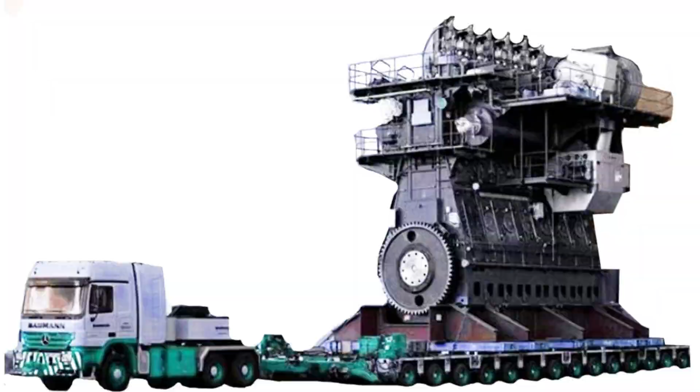This is the world's most powerful engine, and it's a two-stroke. One of the century's greatest feats of engineering is about to astound you. The astonishing Wärtsilä RTA96-C engine is indeed the most powerful engine in the world to date. We're talking about a monstrous machine that propels the biggest oil tankers and cargo ships that rule the seas.

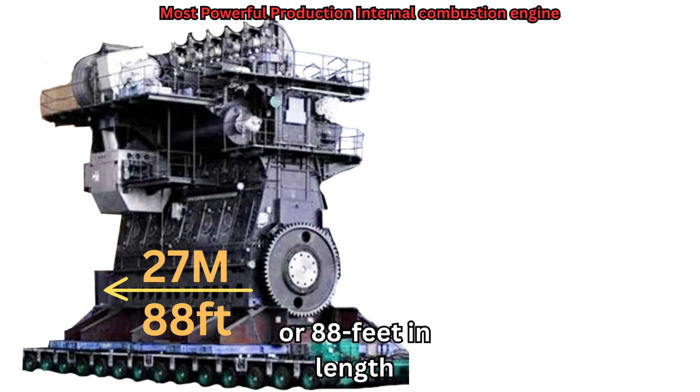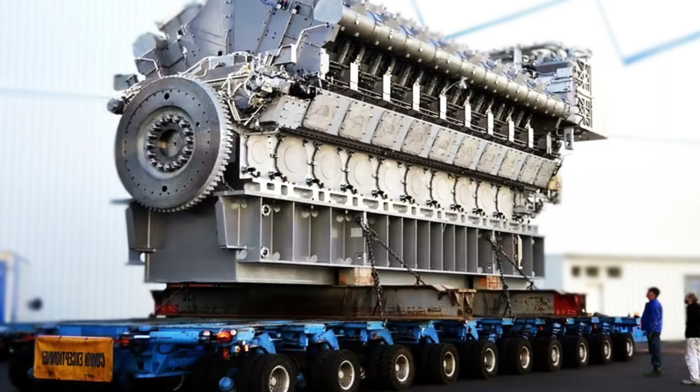The mechanical titan stretches out to a mind-blowing 27 metres, or 88 feet, in length. It rises upwards at a height of around 13.5 metres, a towering 44.3 feet. Wow! Its actual immensity would leave you speechless. However, there's so much more to this incredible engine, so prepare yourself for some staggering figures.

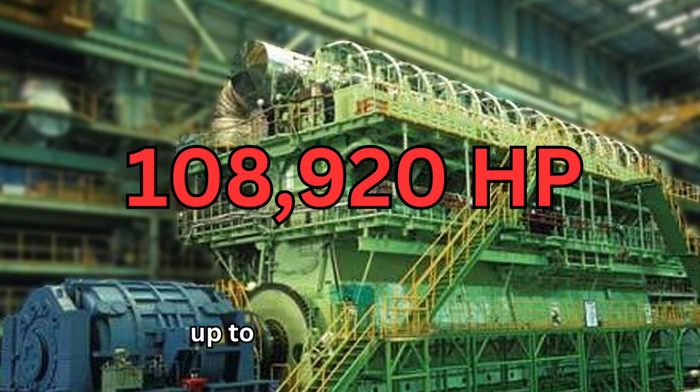This monster can generate up to 108,920 horsepower, which is equivalent to an astonishing 80,080 kilowatts of power. That's the amount of strength required to move those enormous ocean-sailing tankers across the waves.

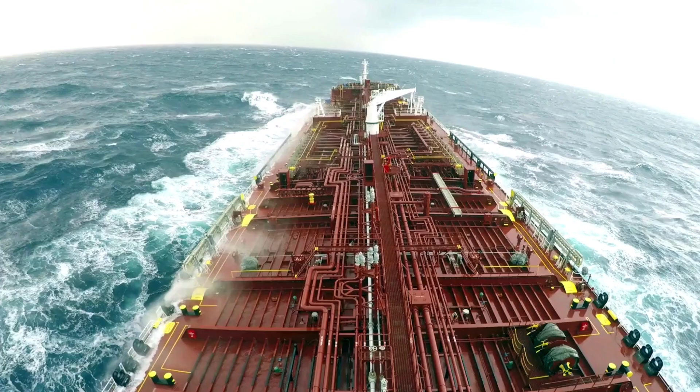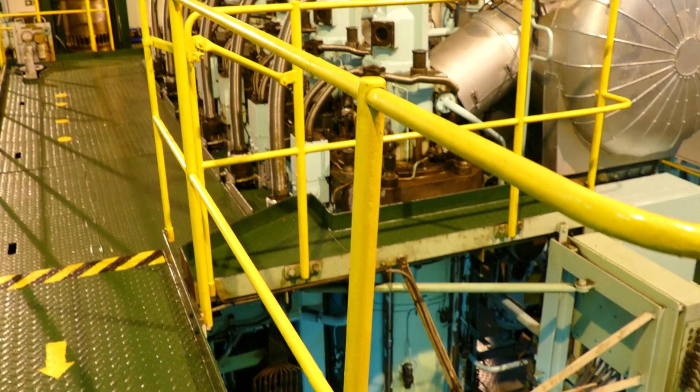Let's set sail on a historic journey through some history of engineering. Imagine the late 20th century, when the maritime industry yearned for bigger, more powerful ships to dominate the waters of the world. It was a nautical miracle that came out of the depths of ingenuity. Here in this arena, where the necessity for innovation and the desire for strength and efficiency collided. And the response to this was the birth of the most powerful engine in history.

An absolutely incredible feat of engineering. This mammoth of the high seas was an engineering marvel that would change the course of maritime history.

With its largest 14-cylinder version, this is a turbocharged, low-speed, two-stroke diesel engine made by the manufacturer Wärtsilä in Finland, and weighs a gigantic 2,300 tons.

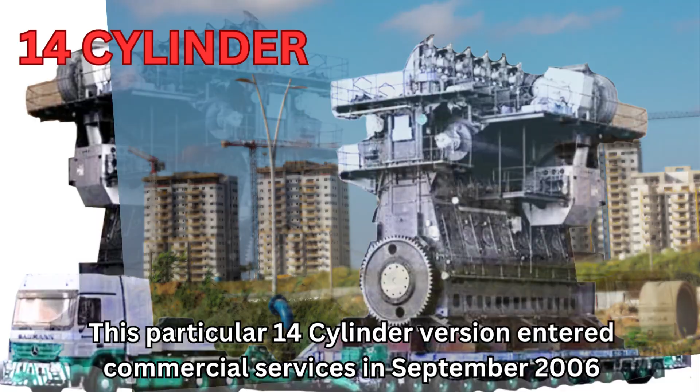This particular 14-cylinder version entered commercial service in September 2006 and uses the common rail system for fuel delivery, which provides maximum performance at lower engine RPMs, ultimately reducing fuel consumption and harmful emissions.

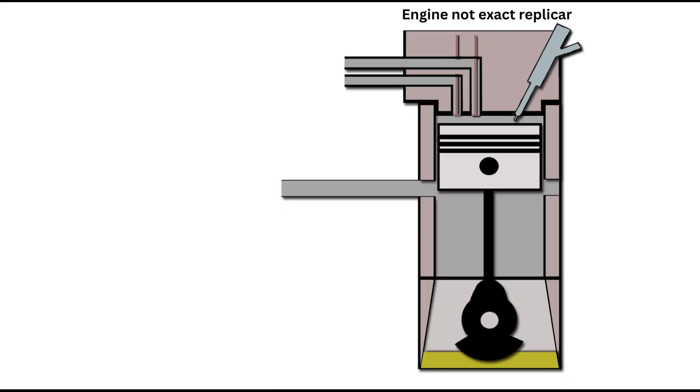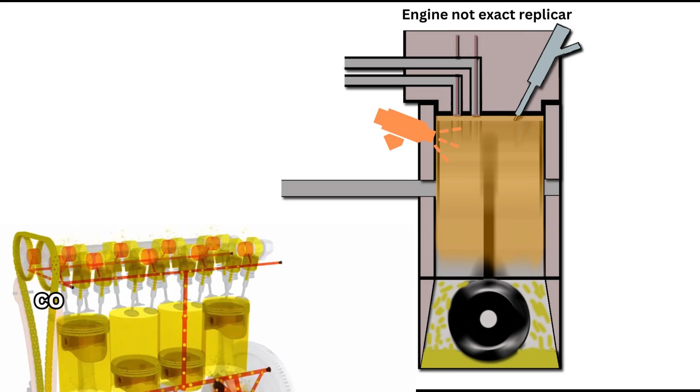There's a split lubrication system for this engine, where the cylinders and the crankcase use their very own specialised lubricant. The cylinders are lubricated by a timed injection of a consumable lubricant, which protects the cylinders from wear by neutralising acids formed by the combustion of high sulphur fuels commonly used.

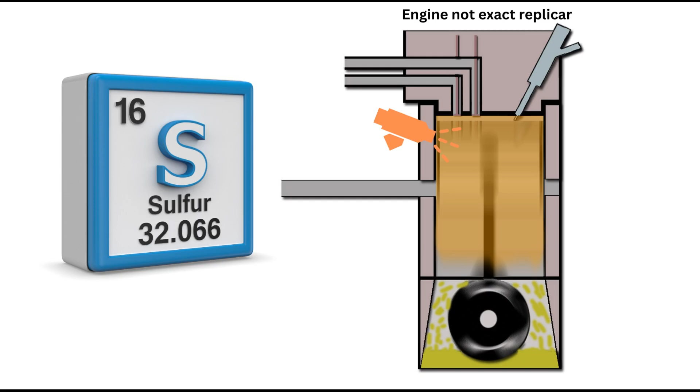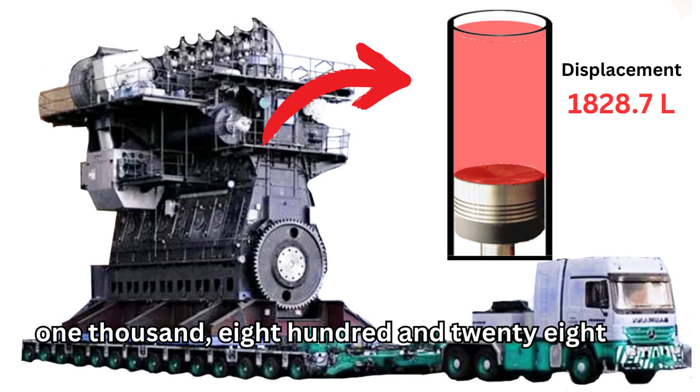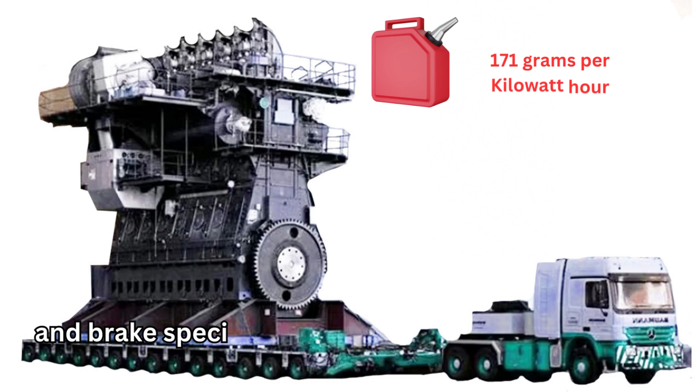With a bore diameter of 38 inches, a stroke of 8.2 feet, and a displacement of 1,828.7 litres, with an engine speed of between just 22 and 102 RPM, having an average piston speed of 8.5 metres per second, and a brake-specific fuel consumption of 171 grams per kilowatt hour of fuel, and an absolute gigantic torque of...

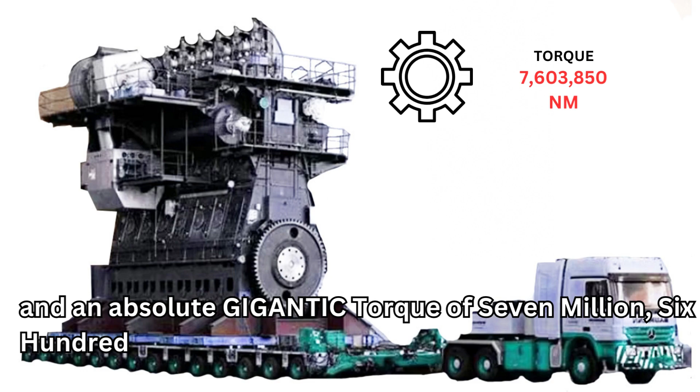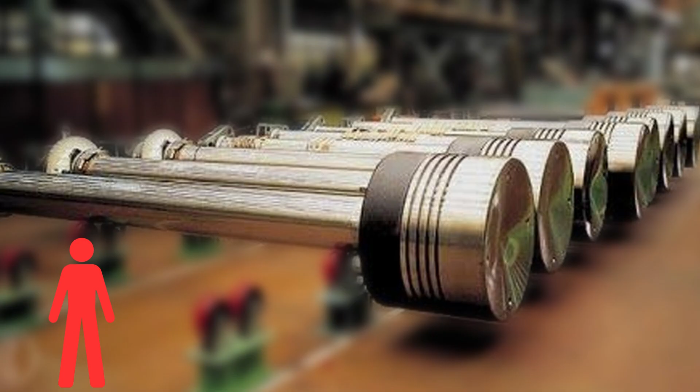7,603,850 Newton metres. And with the weight of the crankshaft alone being 300 tons, and each piston weighing 5.5 tons, with a height of 6 metres each, the Wärtsilä RT Flex 96C is absolutely colossal in every way.

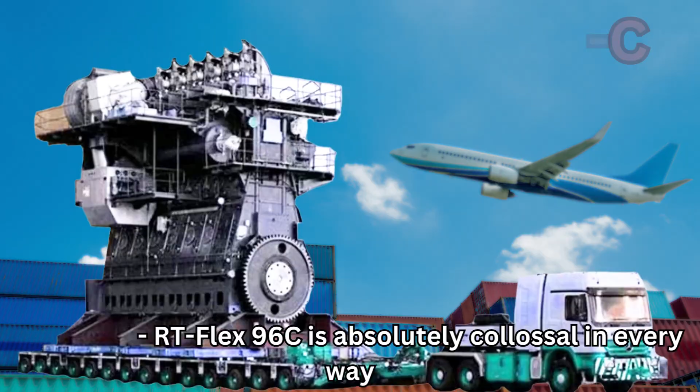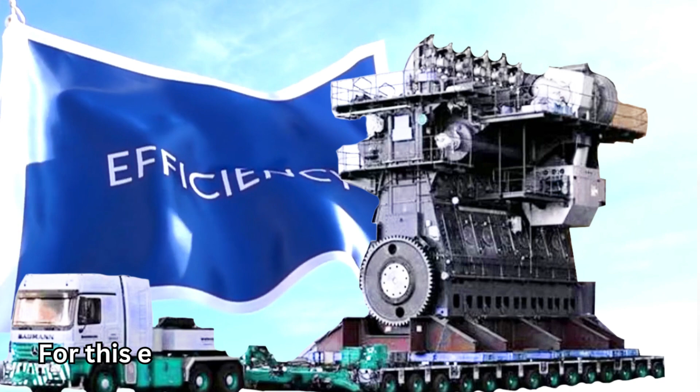But despite having such a huge power output, the RT Flex 96C is an absolute champion for the environment. For this engine, efficiency is equally as important as power. With its great thermal efficiency, this beast is environmentally beneficial for those lengthy sea voyages.

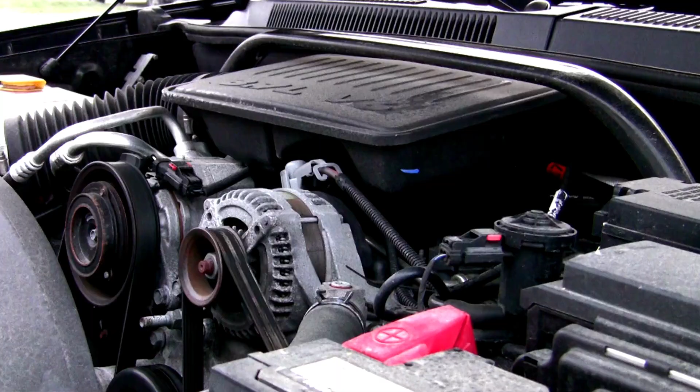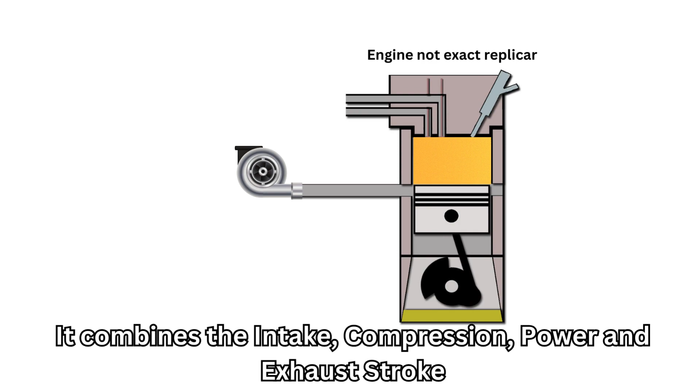This is where you need to forget everything about your car's engine, because this is where things get revolutionary. This engine is a two-stroke. It combines the intake, compression, power and exhaust strokes with just 2 movements of the piston to do its magic.

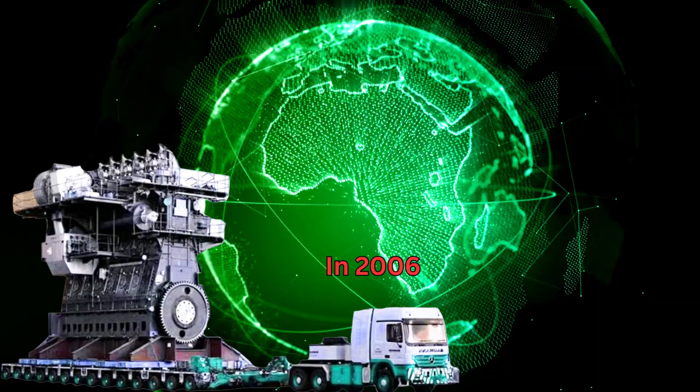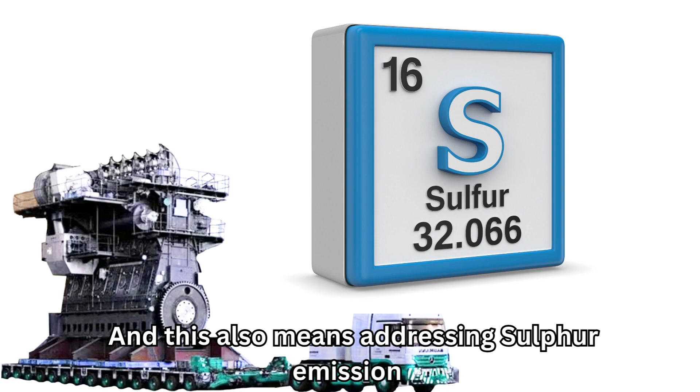However, it's not only about power and efficiency. It's also about preserving the environment. This technological marvel complies with the tightest international environmental regulations by integrating cutting-edge emission reduction technologies, and this also means addressing sulfur emissions. This makes it a truly green giant of the oceans.

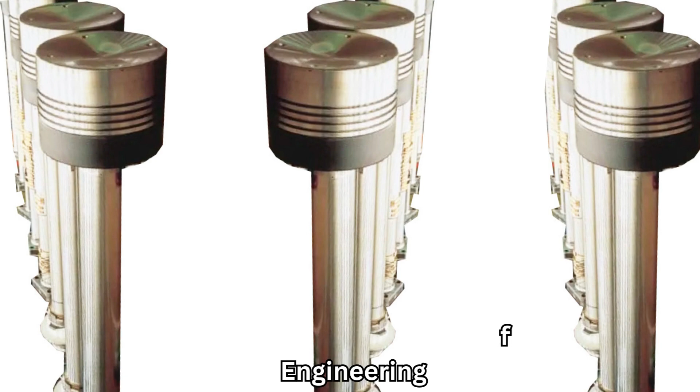And consider this as the grand finale. Each piston is the stuff of engineering fantasies, having a diameter large enough for a typical human being to stand inside. The real kicker, though, is that technology never sits still.

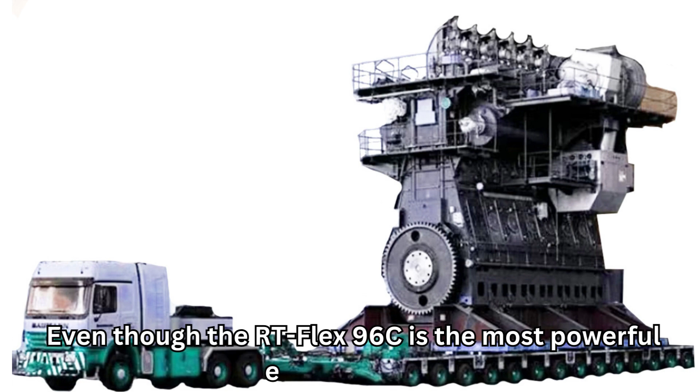Even though the RT Flex 96C is the most powerful engine to date, who knows what amazing developments have occurred behind closed doors that are waiting to come to market. So right here in this day and age, we can celebrate the wonders of contemporary engineering. The Wärtsilä RT Flex 96C is more than just an engine. It pushes the limits of what is practical on the high seas.